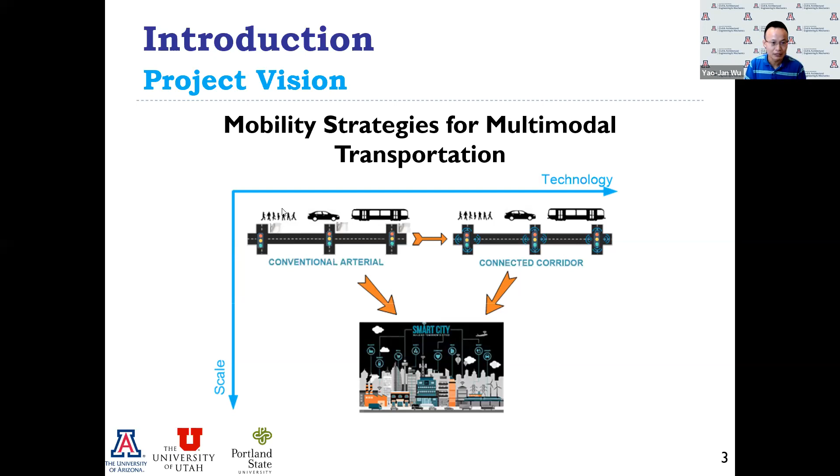Next slide, please. So these are the three major objectives for the study. As I mentioned, the topic of this project is kind of broad, so to make sure we can use our limited resources to finish the whole project, we focus on three things. First is the impact of speed management strategies on conventional roadways, using data-driven approaches to solve some speed management issues. Second is the connected corridor issues done by Utah's team. Third is pedestrian delay at signal intersections.

Basically, we use some existing sensors to grab some new data, and these data are actually available using the current sensors we have in the field. So we did some interesting study to collect some pedestrian delay information.

Anyway, without further ado, I'd like to turn this to Abolfazl. He's actually the main researcher of this project. He helped me coordinate a lot of things among the team, so I'm gonna turn this to Abolfazl to explain our effort. Abul?

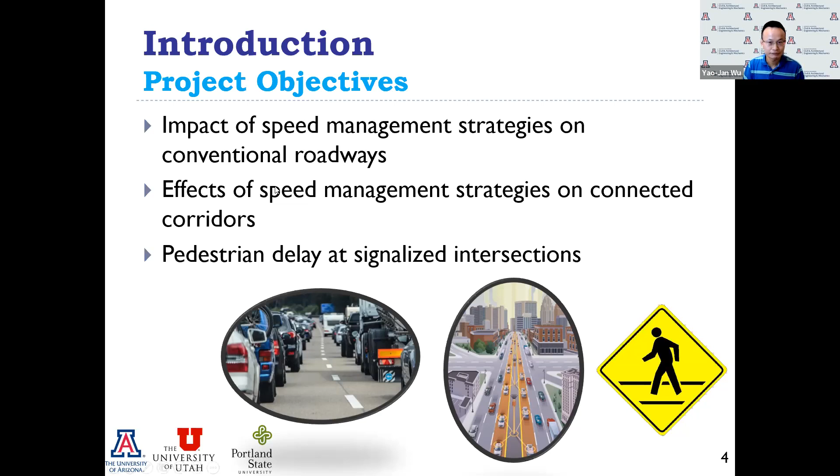Thank you, Dr. Wu. Thank you everyone for attending this session. Before I start, I would like to thank and acknowledge some members, Utah Department of Transportation, NITC, and Pima County Department of Transportation for supporting this project as well.

Perfect. So let me start with conventional corridors. As Dr. Wu mentioned, we focused on two different corridors, conventional corridors and connected corridors. For the conventional corridors, we focused on speed management strategies, or the impact of speed management strategies on the mobility of the corridor and on the intersection performance measures.

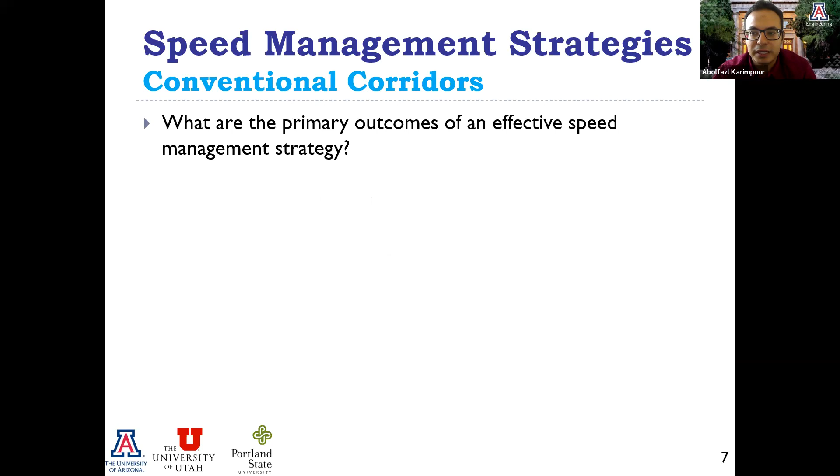Now let me talk a little bit about the primary outcomes of effective speed management strategies. They are aimed to improve mobility and vehicle progression by reducing non-recurrent delays and incident-induced delay. Also, they will improve public health by reducing the number of vehicles which are speeding.

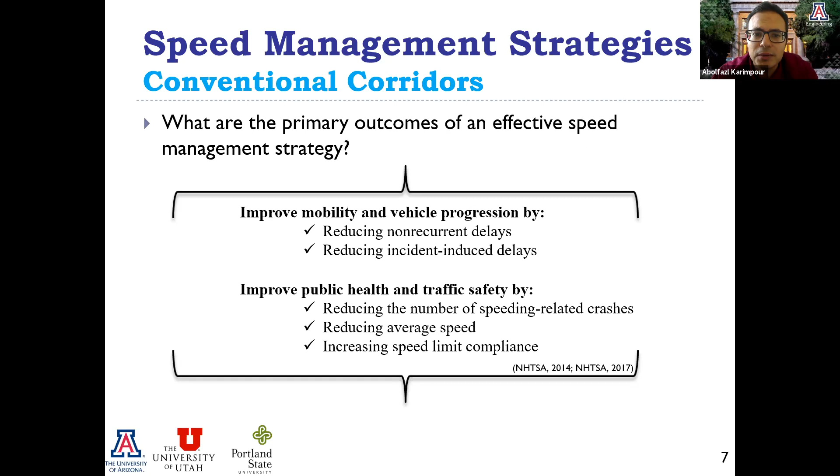What are some of these speed management strategies? One that everyone is familiar with are speed tables, rumble strips, and speed humps. There were a lot of studies that concentrated on these types of speed management strategies, and they showed these strategies are effective. However, we are not able to implement all these types of speed management strategies on different roadways. For example, on high-speed roadways such as our study corridors, we are not able to implement a speed table.

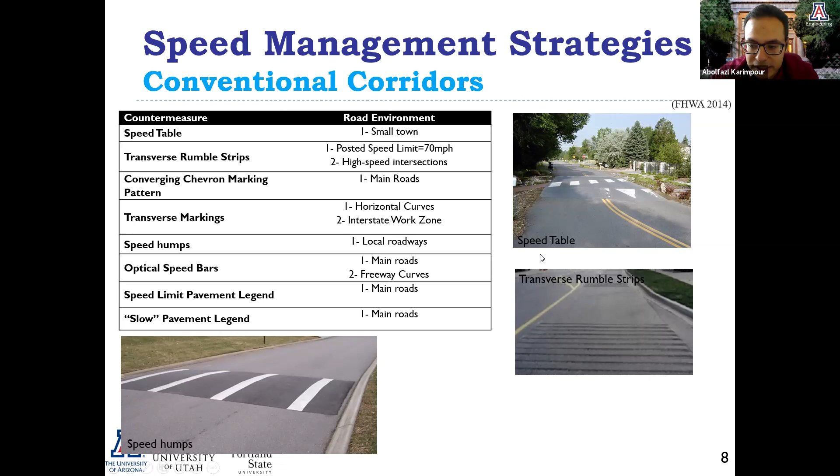There have been some studies on implementation of speed feedback signs in school zones, work zones, transition areas, and urban and rural roads. Most of these studies showed how speed feedback signs are able to reduce speed by different percentages. However, one problem with speed feedback signs that we encountered in our project and study is that we found out that these signs only cause drivers to reduce their speed when they are close to them.

People or drivers only reduce their speeds when they are close to these speed feedback signs. We also wanted to understand whether these speed feedback signs would impact the intersection performance measures.

The other speed management strategy we looked into was law enforcement. There have been a lot of studies showing that law enforcement will reduce aggressive and risky driving. They will target fatal crashes, and also increase seatbelt usage.

However, again, based on the DOT or based on the city, not always enough resources are available to enforce all the roads. Therefore, we need to figure out what type of strategies we can use effectively to enforce speed on conventional corridors.

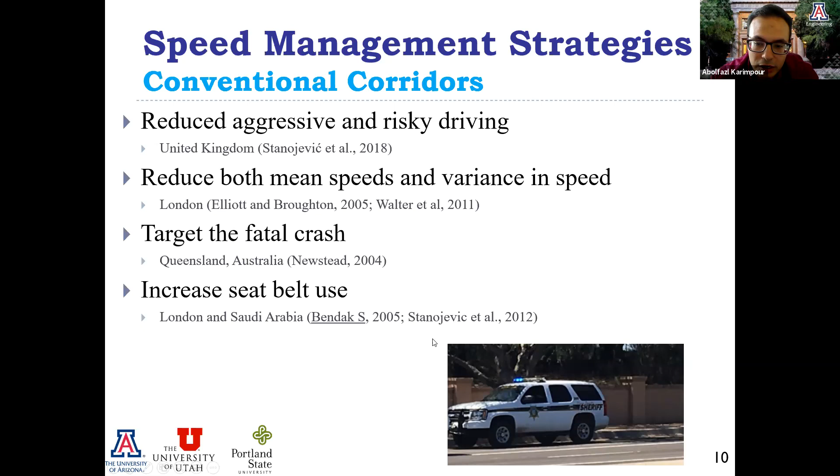So here is a summary. As I mentioned, roadway designs are not always applicable, since we are not always able to put them on high-speed roads. Continuous enforcement is costly, as not all DOTs and cities have enough resources to enforce all their roadways. Speed feedback signs only cause drivers to reduce their speed in the vicinity of these signs, so they are not always the best approach.

And also some of you might have these questions: okay, why not just use speed enforcement cameras? As you know, speed enforcement cameras are not legal in all states. One of these states is Arizona. We are not able to use speed enforcement cameras in our state. Therefore, this study was built to see what other strategies we can use, how we can take advantage of the current studies, and how they will impact speeding and signal performance at intersections.

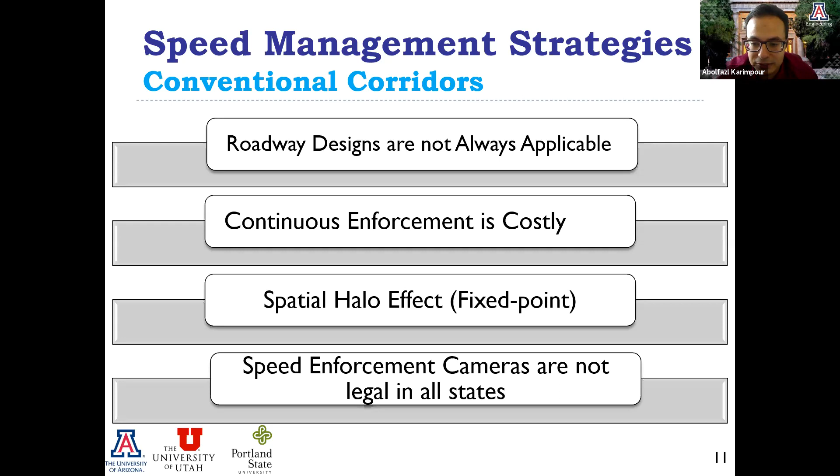First, let me talk a little bit about the impact of speed feedback signs on the intersection performance measures. In order to conduct this study, we looked at 4 segments in Pima County, Ina Road, and we identified some locations with active speed feedback signs and sensors installed at the intersection. For the first part, I will talk about how speed feedback signs will impact the performance of the intersection. As you can see, I have 4 segments here.

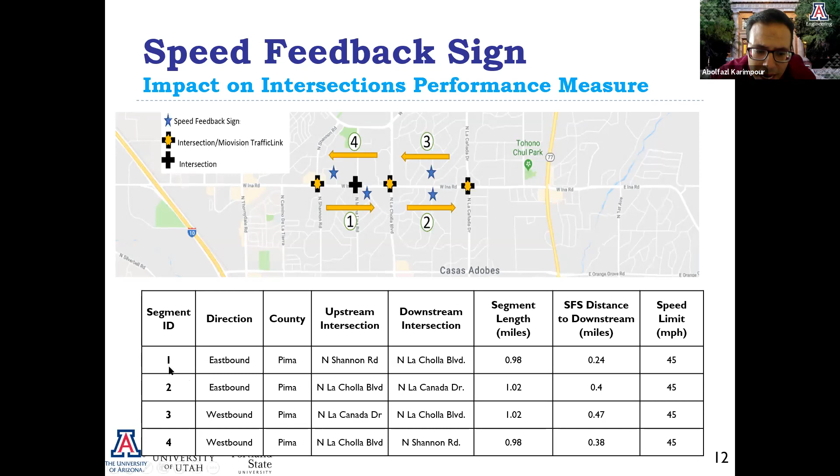In order to conduct this study, we activated these speed feedback signs for a specific amount of time, which was 2 weeks for our study. Then we disabled these speed feedback signs, and then we reactivated the speed feedback signs. And during these procedures, we looked at how signal performance measures such as intersection delay, arrival on red, and split failure might change after enabling and disabling speed feedback signs.

In order to conduct that, we collected 5 different data: vehicle volume, delay, arrival on red, split failure, and speed. All these data were collected from the study corridor that we selected for all of those 4 segments. In order to make sure whether we have a difference in volume or not after enabling and disabling speed feedback signs, we quickly looked at the volume difference for all those segments.

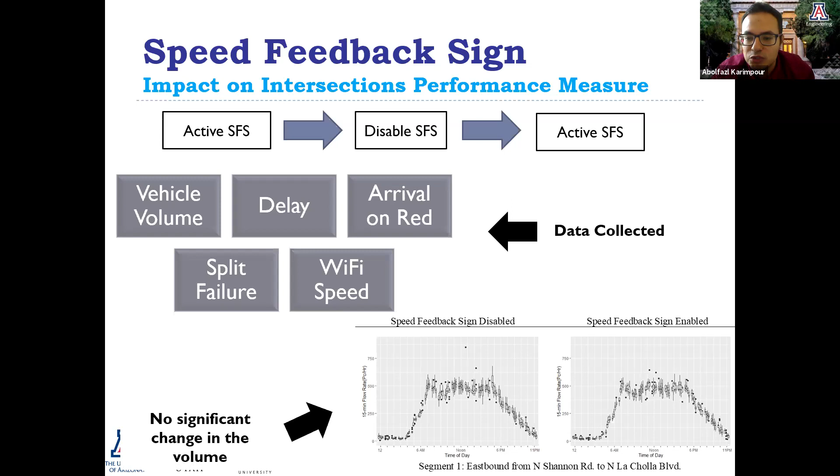Here, I just included one of those segments, eastbound from North Shannon all the way to La Cholla Boulevard. As we dig into the data, based on the statistical analysis that we did, we found out that volume did not change during our study corridor. So for that part, we are good. Now we will look at how enabling speed feedback signs might impact the intersection performance measures.

So in conclusion, at a significance level of 0.05, there is no sufficient evidence to reject the null hypothesis. What was the null hypothesis? The null hypothesis was that arrival on red before and after enabling speed feedback signs is the same. So we conclude that the operation of speed feedback signs does not have a statistically significant impact on the percentage of arrival on red. We did similar studies for other measures. As I mentioned, we did this for delay and for split failure.

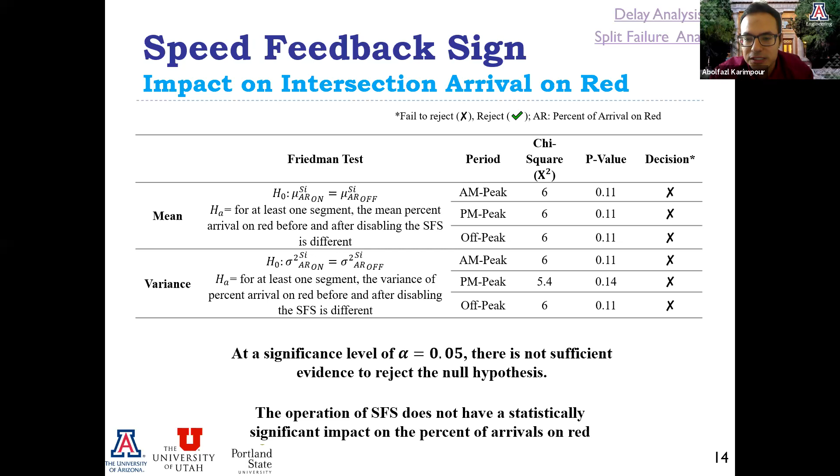However, based on the statistical analysis that we conducted, we found out that enabling speed feedback signs on our study corridor, on that conventional corridor, does not impact any of the intersection performance measures. So in conclusion, we can say that speed feedback signs do not have any statistically significant impact on signal performance measures. However, the next question of this study was how to improve the effectiveness of speed feedback signs.

As I mentioned earlier, speed feedback signs have an issue. Drivers only reduce their speed in the vicinity of these speed feedback signs. So we wanted to know how we can solve this issue, because in Arizona, we are not able to use a speed camera. So what can we do? We came up with this idea.

What if we mix and match speed feedback signs with law enforcement? And instead of using law enforcement for the whole time period, let's use periodic law enforcement. Periodic law enforcement means that we talk with the sheriff department and ask them, please show up at these locations that we identified for you at certain points in time during the data collection.

For example, if we had 1 week of data collection, we ask the sheriff, we ask the lieutenant to show up randomly on these locations. So in order to understand this, we set up this study experiment.

We selected 3 sites with only speed feedback signs, no law enforcement. Then we selected 3 sites with periodic law enforcement. And finally, we selected 3 sites with periodic law enforcement plus speed feedback signs.

In order to understand how drivers behave in these different sites, we collected data at 3 locations. This data collection design is similar for all those 9 sites. We collected data at 3 points. 1 point, we call it baseline data collection. This location was upstream of speed management strategies.

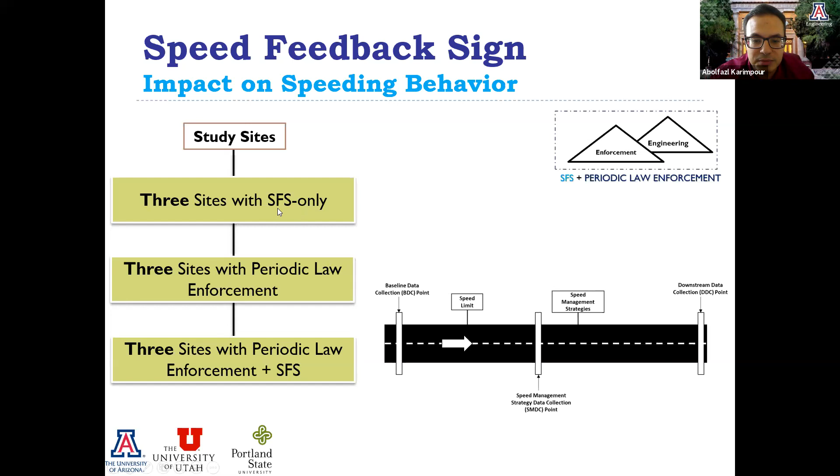We put this location to find out whether the drivers will regain their speed after passing these speed management strategies, or they will keep their speed low. The results were very interesting based on what we observed. So I'm just going to talk about the results for 1 site each: speed feedback sign only, periodic law enforcement only, and periodic law enforcement plus a speed feedback sign.

The first location that I want to talk about is a location where we have both speed feedback signs and periodic law enforcement. This is the first location where we collected data, baseline data collection. The average speed for this location was 47.5 miles per hour. The second location that we collected data was in the vicinity of speed management strategies. The average speed that we observed here was 45.6. And finally, after passing the speed management location, we collected the speed again, 42.7.

It is important to mention that these data are for 1 week of data collection. So we had more than 1 million points of data, and this is just the average of them. So we can do a statistical test to see whether this reduction was statistically significant or not. For this case, as you can see, we had almost 2 miles per hour reduction in speed, which was statistically significant. Going from this location to this location, again, we saw almost 3 miles per hour reduction of the speed, which was again statistically significant.

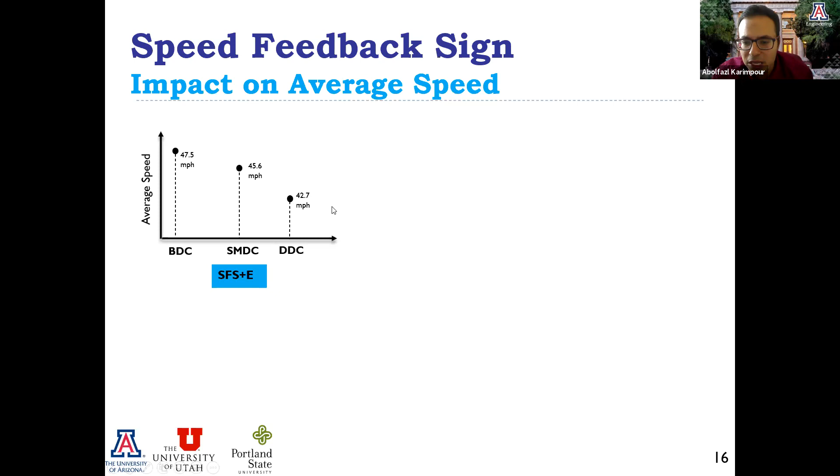Now let's go to the other location. At this location, the speed management strategy installed there was periodic law enforcement. This is the first location, baseline data collection. This is a location where the vehicles were not aware of that specific speed management strategy. So the drivers had no idea there was a police standing there or there was a speed feedback sign there. The average speed here was 48 miles per hour.

And at the location where drivers saw the police car or the speed feedback sign, they reduced their speed. The average speed reduced to 45.6 miles per hour. And then after passing this location, which was downstream data collection, you can see that drivers regained their speed by almost 1 mile per hour. So based on this, you will see that drivers only reduce their speed in the vicinity of periodic law enforcement.

Now let's look at the other strategy, which was a speed feedback sign only. Again, we collected data at 3 locations. Before the drivers were aware of speed management strategies, they were going 43 miles per hour. When they saw the speed feedback signs, they reduced their speed to 42 miles per hour. And then after passing the speed management, which for this case was a speed feedback sign, they regained their speed and their speed increased by almost 1 mile per hour.

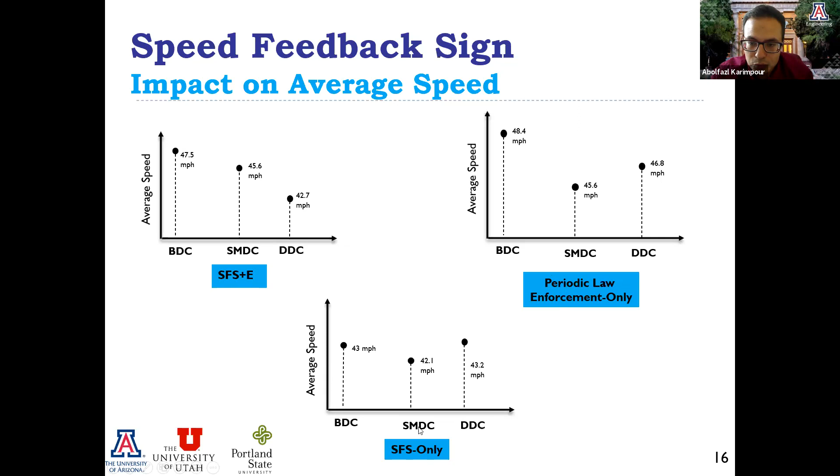So in conclusion, based on the first section of this study, we identified a key speed management strategy. This key speed management strategy was combining speed feedback signs with periodic law enforcement, which will increase the spatial effectiveness of the speed feedback sign and will not have any impact on the intersection performance measure.

The result or the conclusion of this study: DOTs that are looking to expand their speed feedback sign coverage can take advantage of these results and can use this methodology for their roadways. And finally, coordinated efforts between transportation agencies and law enforcement will help to address the speeding issues which I mentioned.

There are so many different speed management strategies. However, looking at each of them individually, we are not able to solve all the speeding issues. So with this study on the conventional roads, we found out that if we combine speed feedback signs with periodic law enforcement, not only are we able to reduce speeding on arterials, but also this strategy will not have any impact on intersection performance measures, and it's not as costly as putting a police car or a sheriff all the time at one location.

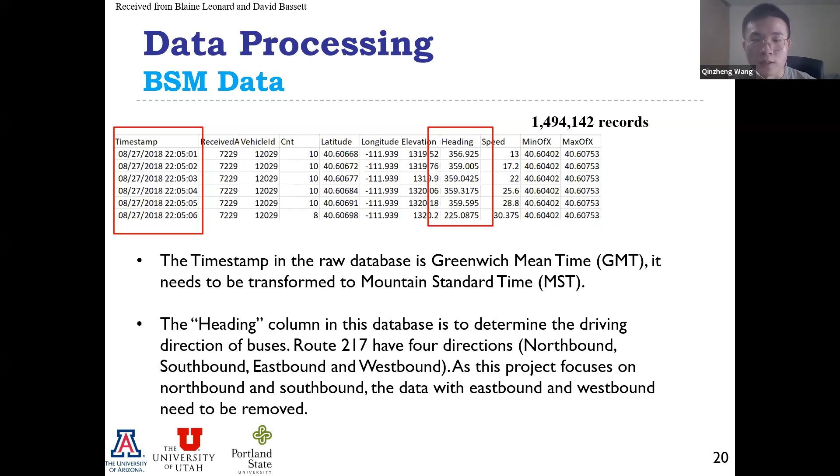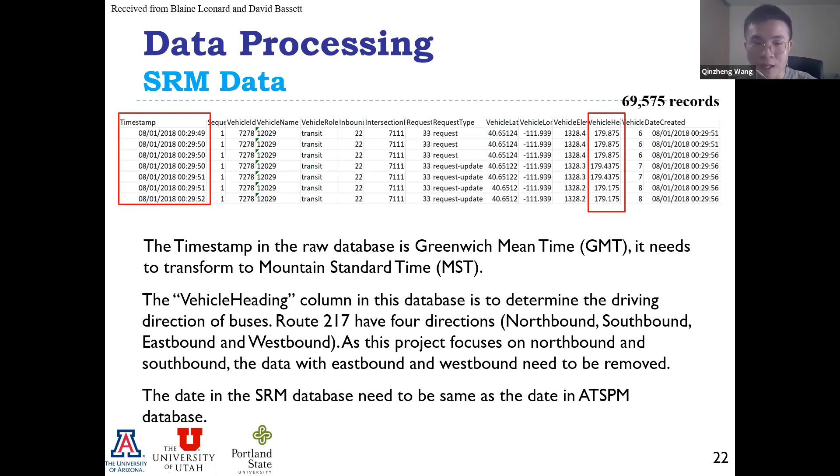So the date in the SRM database needs to be the same as the date in the ATSPM database. And this is the sample data of ATSPM data. Like I said before, the date in the ATSPM database needs to be the same as the date in the SRM database. Because there are two types of controllers along this corridor, and the ATSPM database uses the event code to determine if the TSP is served, and the event code is related to the controller type. So we need to add the controller type for each signal ID.

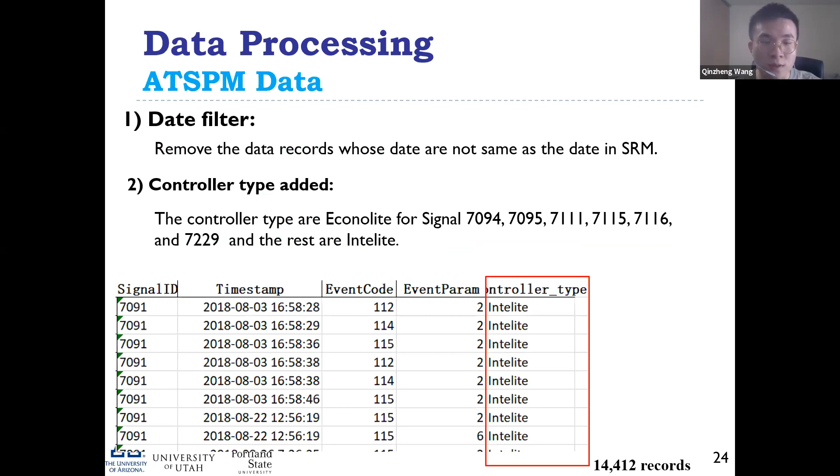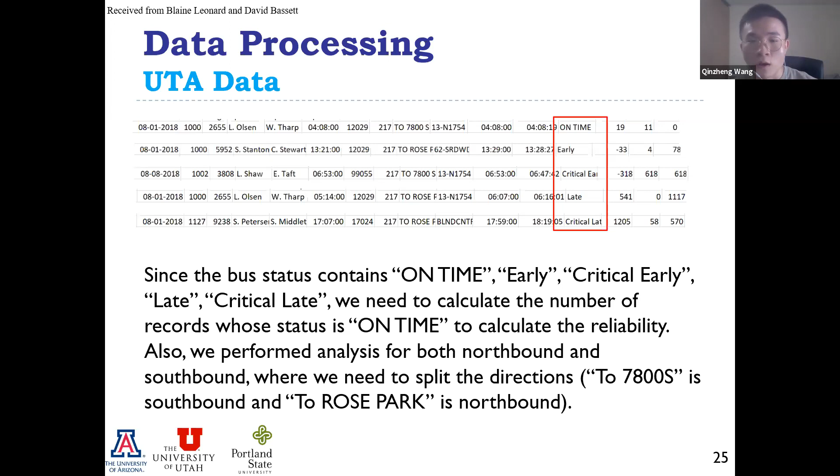And this slide shows how to process the ATSPM data. And this is a sample of UTA data, because this column shows that there are 5 statuses of the bus according to UTA. They are on time, early, critical early, late, critical late, and we need to filter on time to calculate the reliability. Besides, we need to split the directions into northbound and southbound for analysis respectively.

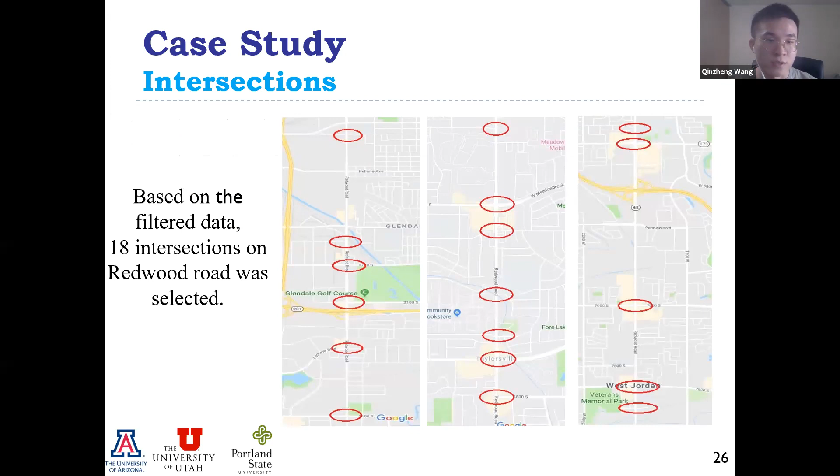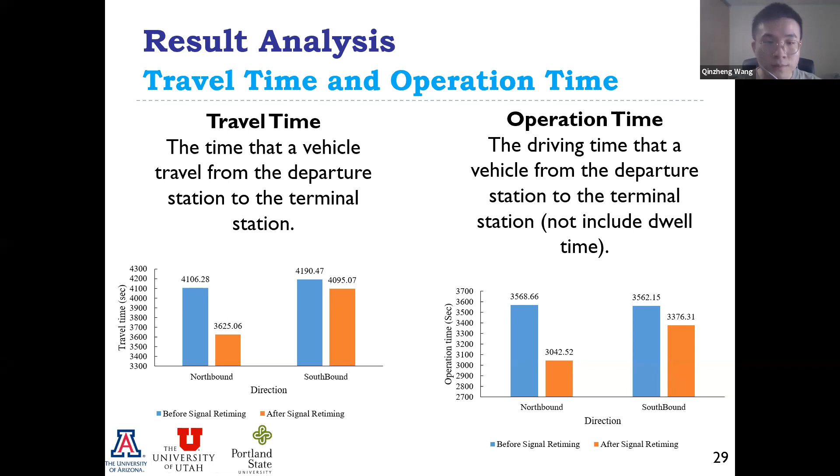This is because for many requested TSP, the bus can travel across the intersection during the green time. So this TSP request will be cancelled. In conclusion, the TSP supported by CV technology can improve the bus reliability, and if we design a better signal timing plan, the bus reliability, bus travel time, and operation time can improve further.

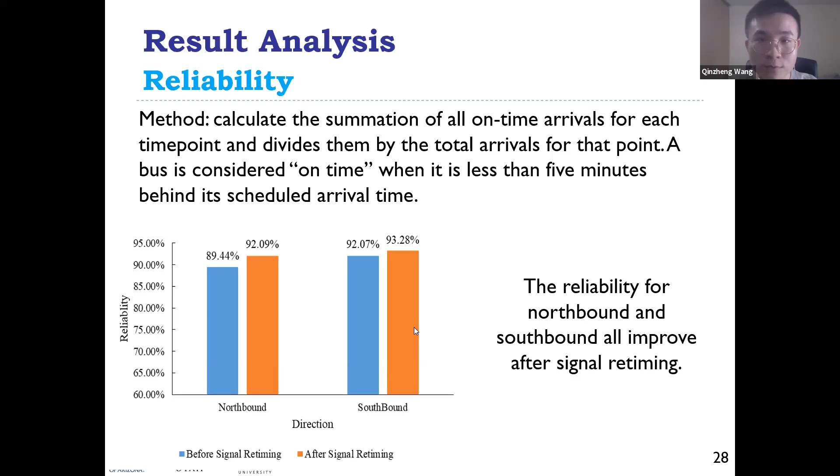Now I will dig into the multimodal part of this presentation. For this part, we dig into pedestrian delay. What are the measures? What are the ways that we can estimate pedestrian delay at signalized intersections? But the main question is, why is it important to understand the pedestrian delay? Why is it important to estimate pedestrian delay?

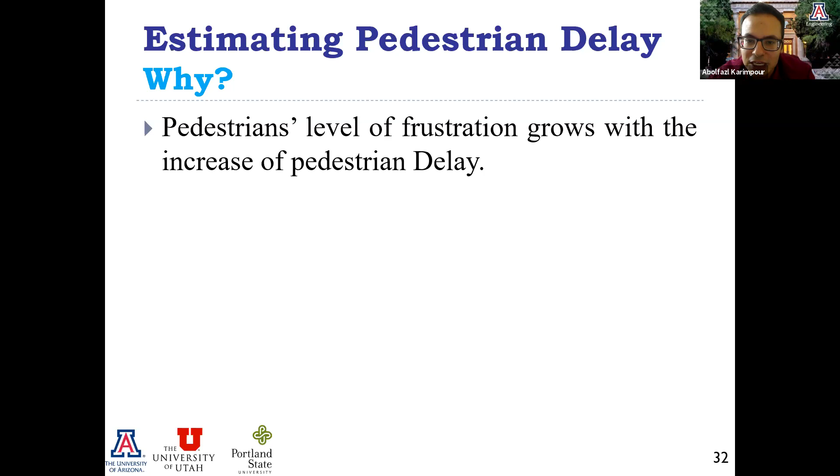The first thing is that, as you all know from your daily life, pedestrian frustration grows with an increase in pedestrian delay. So if I'm standing still at an intersection and I don't get a green light when there are no vehicles coming, I tend to cross the intersection. So we have to make sure that our signalized intersections are developed in a way that we also consider pedestrian safety.

The second reason would be that delay in general is one of the most significant signal performance measures. Most studies have concentrated on vehicular delay. However, it is also important to look at more vulnerable road users, such as pedestrians. What are the delays that they are experiencing in their daily use? As you all know, delays quantify the operational level of service at an intersection, either vehicular delay or pedestrian delay.

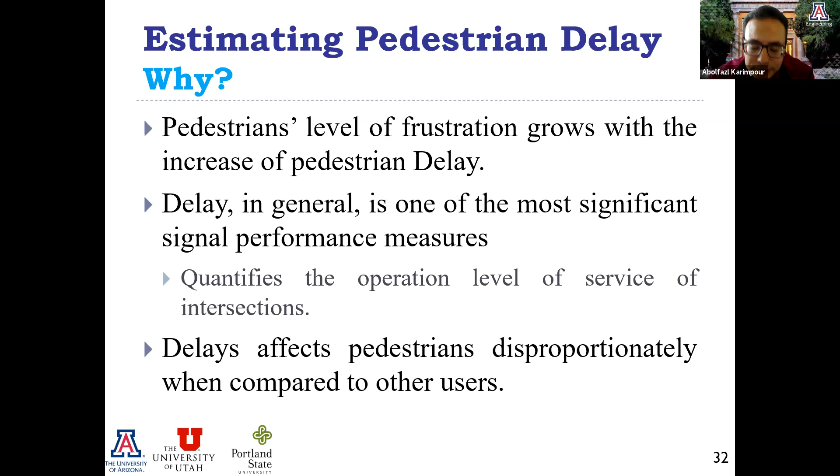And finally, pedestrian delay affects pedestrians disproportionately when compared to other users. Most DOTs or most cities mostly concentrate on vehicular delay. However, it is very important to make sure that the delay imposed on pedestrians is proportional to the delay of other road users. So in order to understand the delay of pedestrians, we developed these measures to estimate pedestrian delay at signalized intersections.

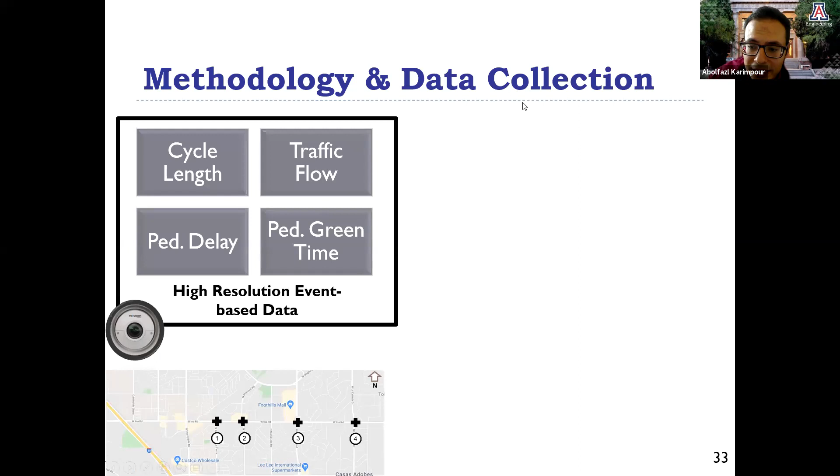However, we wanted to know how we can do this approach using the available sensors installed in the city. To do that, we selected 4 intersections, again on Ina Road, Pima County, and used the available smart sensors to collect high resolution event-based data. The data that we collected from these intersections were cycle length, traffic flow, pedestrian delay, and pedestrian green time. And we proposed this approach to estimate pedestrian delay.

So the first step was we identified some variables, such as cycle length and traffic flow, that can best characterize pedestrian delay distribution. Then we developed a finite mixture modeling approach using the data that we collected to model pedestrian delay. And finally, we evaluated whether the proposed method for pedestrian delay estimation is also transferable to other intersections.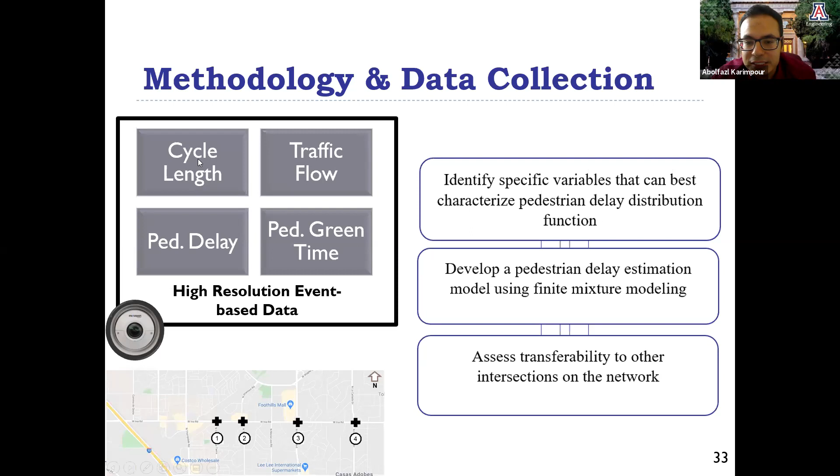So maybe not all the intersections in Pima County or in Utah are equipped with these types of sensors. So what can we do? If we have these variables, for example, cycle length and traffic flow, are we able to use this proposed method to estimate the pedestrian delay? We will answer this question in this study as well. So I won't talk about the modeling, the formula, the approach that we used. I'll jump straight into the results.

As you all know, there are several well-known pedestrian delay estimation models. One of them is HCM 2010 and HCM 6th edition, which I have the formula for here. The other methods, which are a little bit older, are the Virkler and Dunn methods. So in order to understand where our proposed model stands, we compared our model with several of these well-known models. As I mentioned, we had 4 intersections. So I developed the delay per time of day for each of these intersections and compared them with these additional methods.

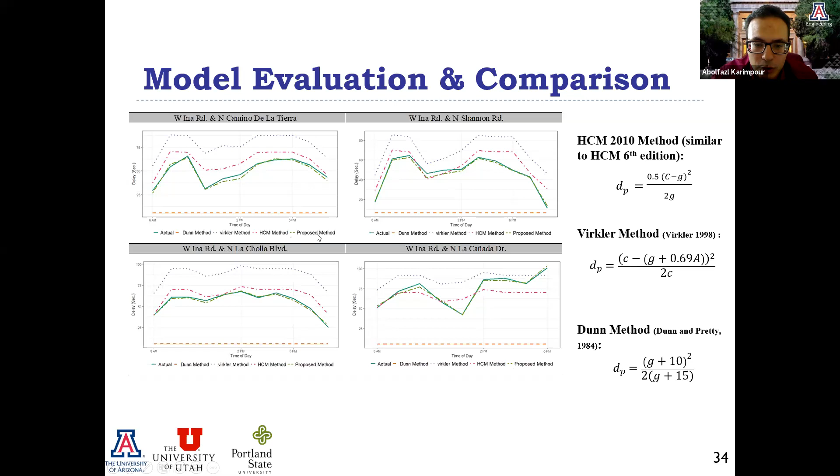The actual is the actual delay, and this line is the proposed method. Looking at these figures individually, you will understand that with the approach we are proposing, we are able to capture all the fluctuation of pedestrian delay during the day. For example, if you look at this point, there was an increase in the pedestrian delay. Our method was much more accurate than the other 2 methods.

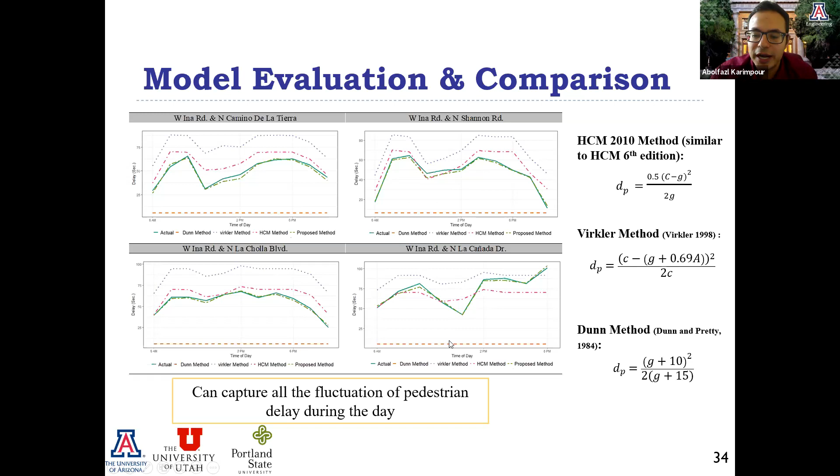Or look at this intersection. There is a drop in pedestrian delay at this location, at 1 p.m. Looking at the proposed method, you will see that we are able to clearly capture these spikes. So the second conclusion would be that the proposed method is robust toward the spikes happening during the day. So comparing this proposed method with other conventional methods, you will see that the proposed method is superior in accuracy, and it's more robust toward the fluctuation of pedestrian delay during the day.

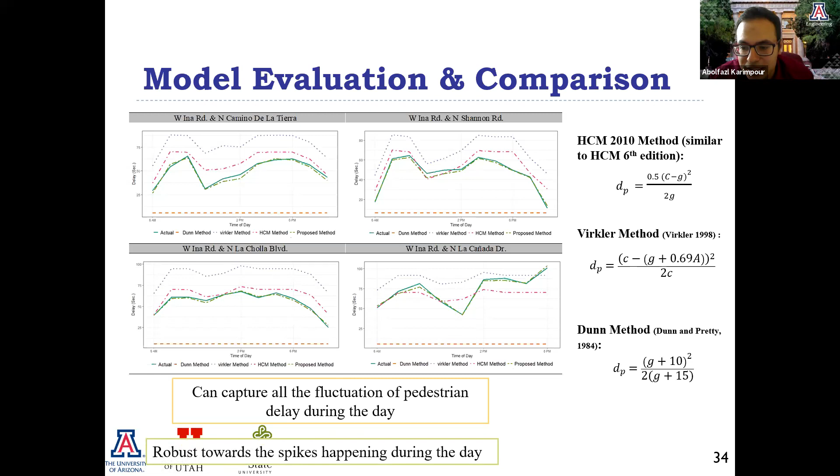The second thing that I want to talk about is whether we are able to use this model at other intersections. So we did a quick transferability test for this purpose.

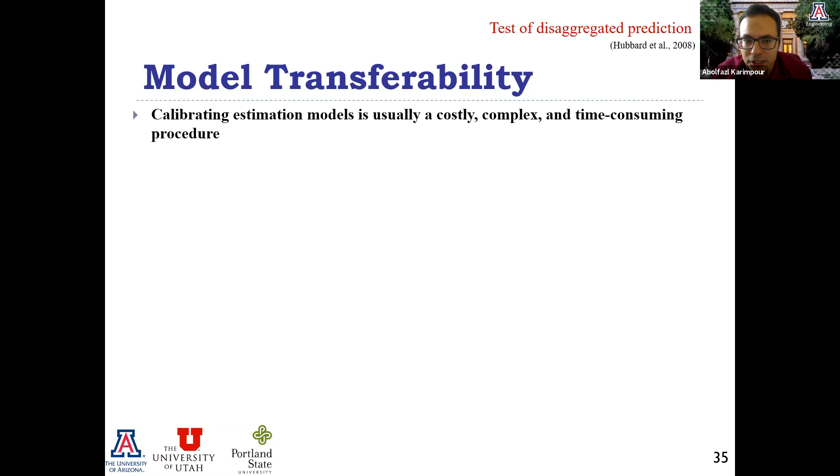Why? Calibrating an estimation model is usually a costly, complex, and time-consuming procedure. Second, as I mentioned, it is not always feasible for agencies to collect sufficient traffic data at each individual intersection to perform this modeling procedure.

So what we did here is we trained models, 4 models, with 1 single intersection, and then predicted the pedestrian delay at the other intersections in order to understand whether the model developed for 1 intersection is also able to estimate or predict the pedestrian delay at other locations.

The number here is RMSE per second for the proposed model, and the one in parentheses is using the HCM 6th edition method. So for this specific location, let's take this intersection as an example. If I develop a pedestrian estimation model for this intersection and predict the pedestrian estimation for the other intersection using the proposed method, I can get pedestrian delay with 17 seconds error, RMSE. However, if I use the HCM method, I get 40 seconds of delay.

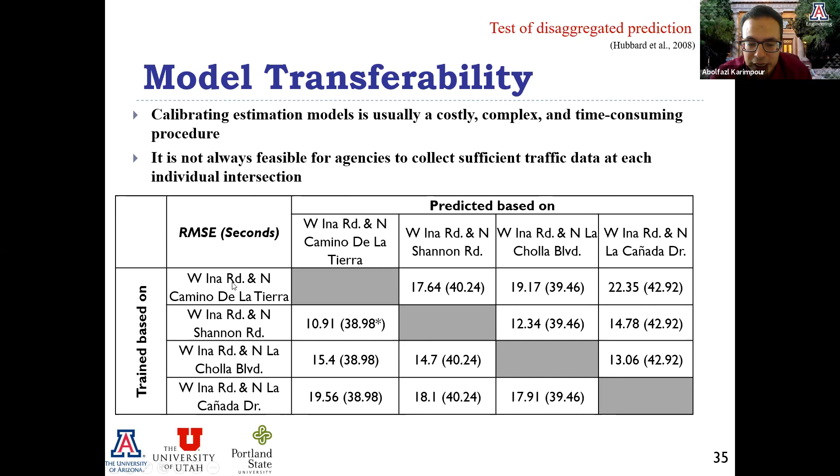And similarly for the other intersections, the other transferable models, you can see similar results. So looking at these results, you will understand that the proposed method is also able to predict other intersections' delay as well. We did this for 4 intersections, trained on each and tested on 3 other intersections.

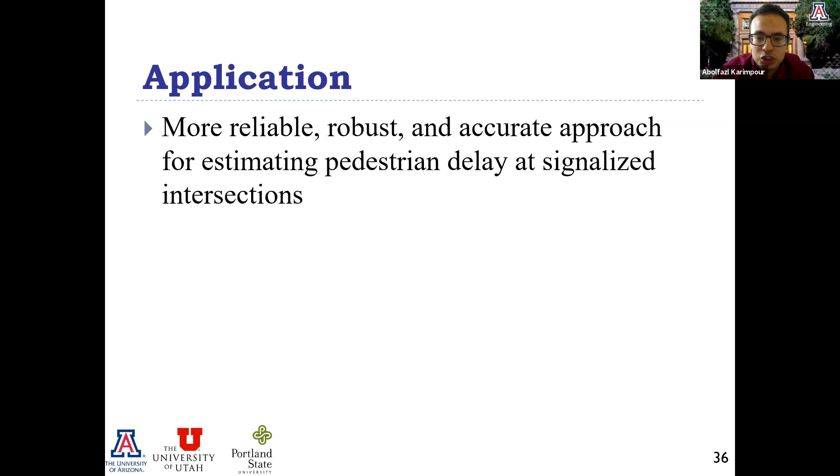So what are the applications of this research or method? First of all, we proposed a more reliable, robust, and accurate approach for estimating pedestrian delay at signalized intersections. Second, based on this approach and modeling, we were able to develop a pedestrian delay density function at each intersection. This function can help analyze the risk of pedestrians violating the signals.

Why can this help? Because if you look at the pedestrian delay distribution at locations or time periods or intersections where you see a high amount of pedestrian delay, there is a more likely chance of pedestrians violating the signal. And lastly, using this project, we were able to provide a network-wide model for estimating pedestrian delay.

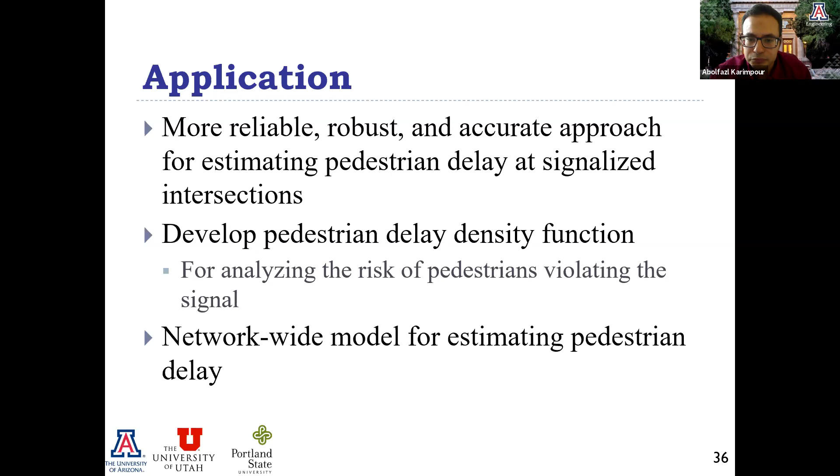Now let me summarize all these projects and describe the project takeaways. First, using all the components and looking at each individual component of this study, we understand the impact of speed feedback signs along traditional corridors. Secondly, with the second component of this research, we understand the impact of signal retiming and coordination on transit signal priority, which was used in a connected corridor.

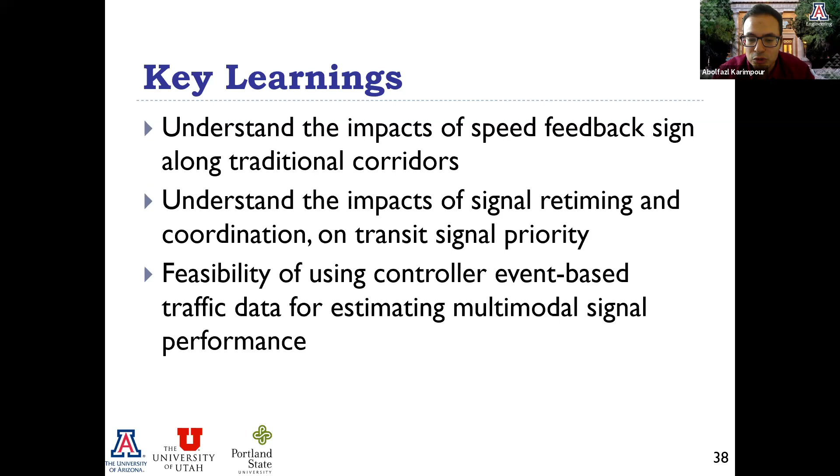Finally, the other key learning of this project was the feasibility of using controller event-based traffic data for estimating multimodal signal performance, which for this study was pedestrian delay.

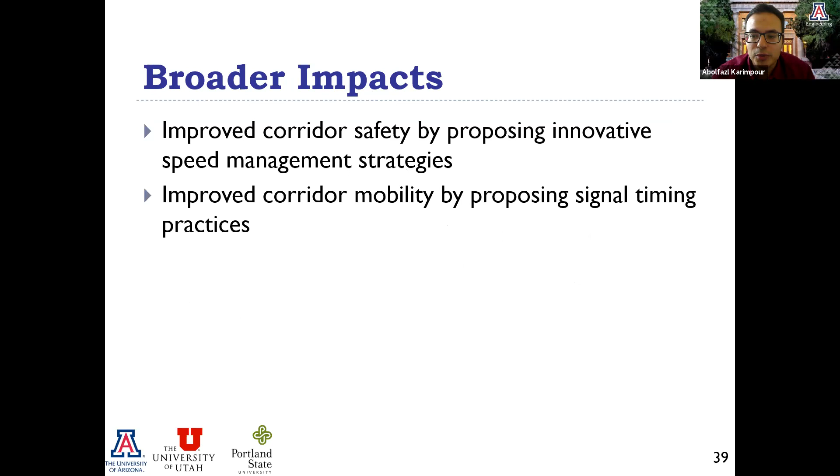And what were the broader impacts of this research study? First, we were able to improve corridor safety by proposing innovative speed management strategies. Second, we improved corridor mobility by proposing an innovative signal timing practice.

Based on the multimodal model we developed and the results, DOTs can encourage the use of eco-friendly mode choices on the corridors, which would be walking for this case study, encouraging more people to walk and bike.

And one interesting and exciting outcome of this study, which I really enjoyed working on, was the tri-university collaboration. I got to know what other universities are doing and what other DOTs and cities are more focused on and what is more important for them.

And finally, we had university-public agency collaboration, which I would like to thank again, our agency collaborators, Utah DOT and Pima County Department of Transportation.